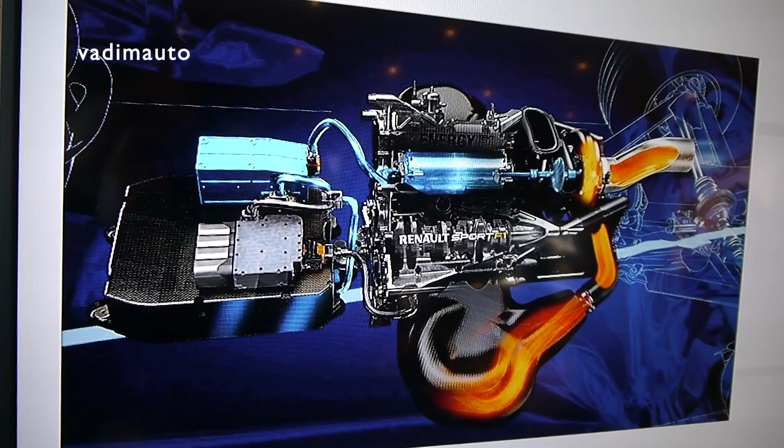The system borrows from Renault's Formula 1 team energy recovery practice, and an early version of the hybrid system was used in the EOLAB concept.

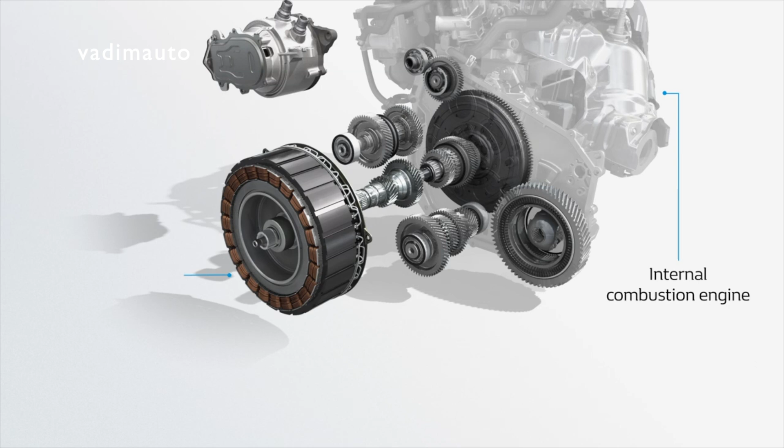What is E-Tech? It's a relatively simple and lightweight construction. There are two electric motors to assist a 1.6-liter, about 100 HP internal combustion engine used in Renault, Nissan, Dacia, and Lada Vesta. The naturally aspirated petrol engine has been reworked specifically for the hybrid.

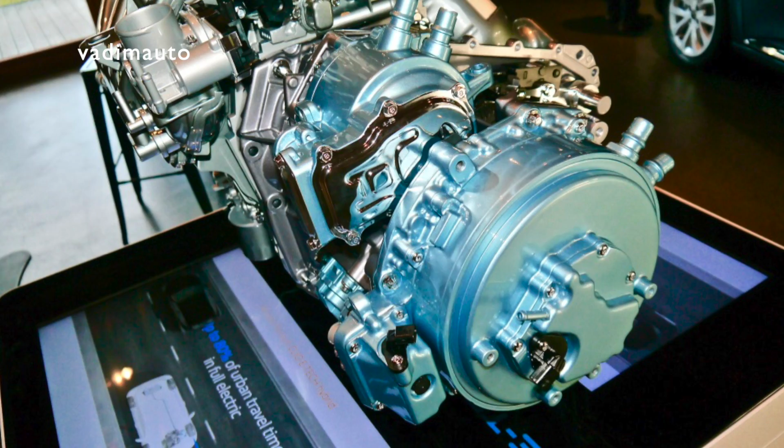There are no drive belts on the engine for the water pump, air conditioning compressor, brake and steering servo — all are electrically driven. The biggest high-voltage e-motor has 230 volts and 48 horsepower output. The smallest one, the high-voltage starter generator, has 230 volts and 20 HP.

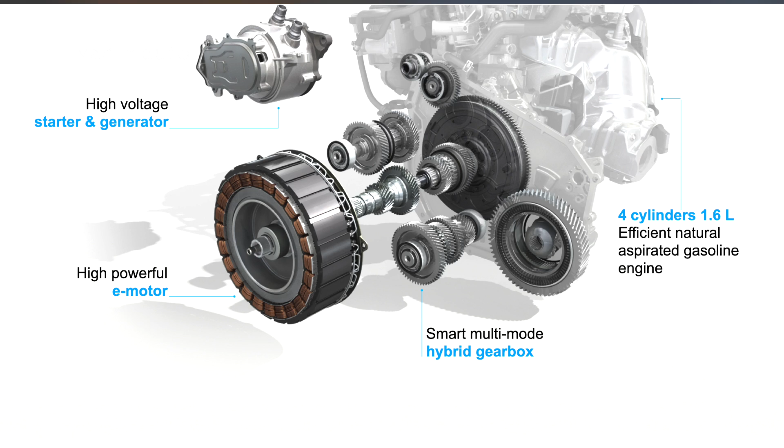Both motors can drive, recharge, and overrun. There is a new multi-mode gearbox with two gearboxes inside: a 4-speed gearbox for the petrol engine and a 2-speed for the e-motor. Each has a neutral gear.

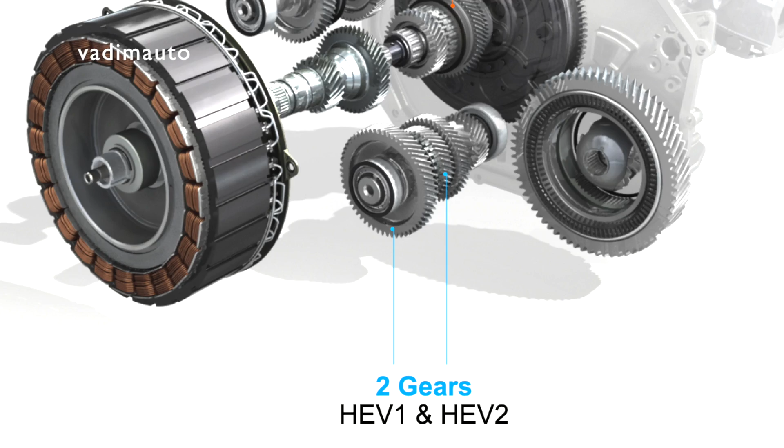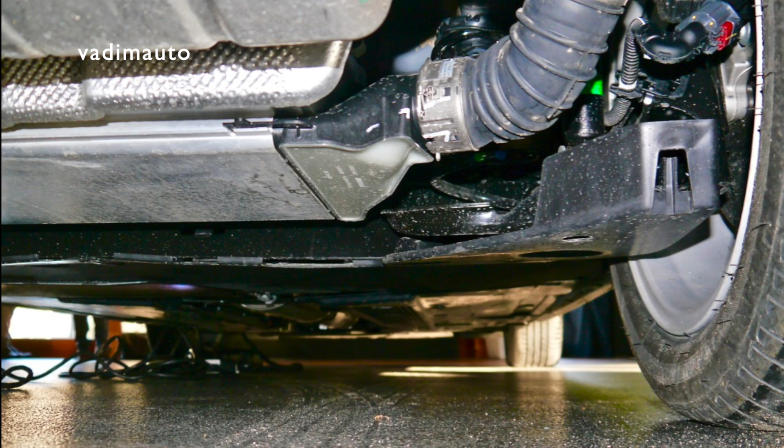The gearbox itself is a dog type, like in a racing car — no synchro, and clutch-free. The electric motor is used to start and move the car, and to go backwards too; the clutch is not needed. There is a 1.2 kWh lithium-ion battery in the back of the car.

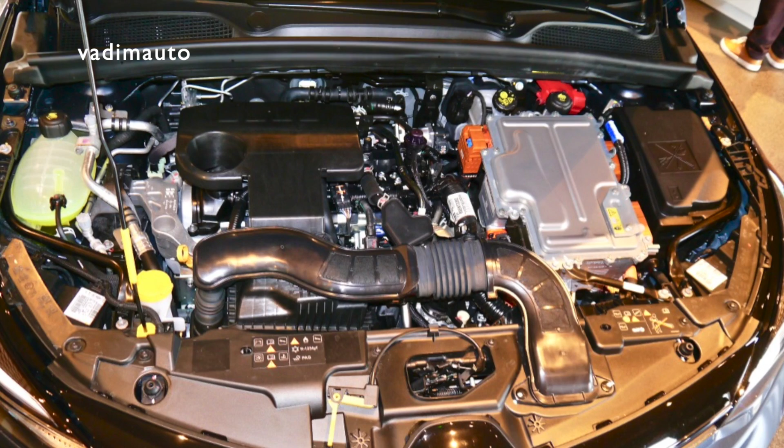It's charged by regenerative braking via the smaller motor generator, which is connected to the petrol engine. The Clio has a 140 horsepower combined output in full acceleration. The power comes from all three motors, petrol and two electric.

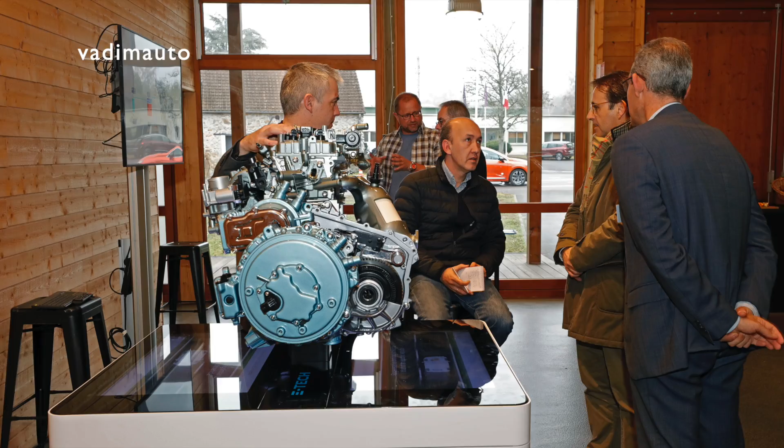Outside, it's the same Clio 5, with an E-Tech hybrid blue badge only. Inside, the car is fitted with a 9.3-inch screen with the new Renault Easy Connect connected interface.

There are several driving modes. Eco means you can use the electric battery for driving more than the petrol engine. My Sense blends petrol and electric motors for maximum economy. And Sport allows you to use the maximum power of all three engines.

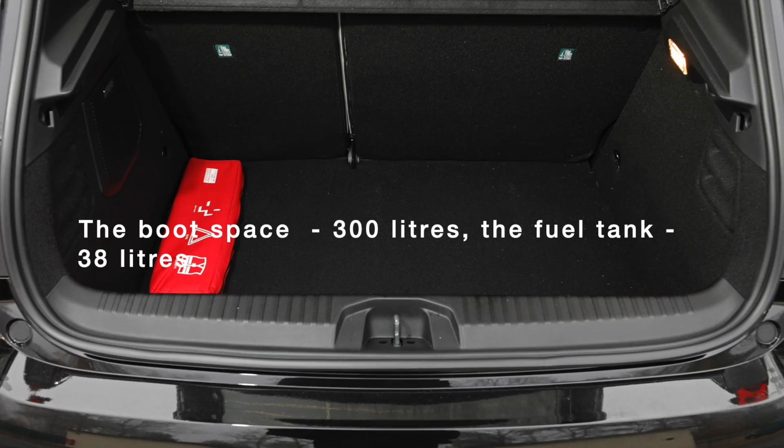Okay, here we go. If it's cold outside and the battery charge is low, the cabin needs to warm up. The petrol engine starts via the smaller electric motor to charge the battery to the required level. The combustion engine can't directly drive the wheels when you start to drive, until the car reaches about 15 km per hour.

This is because low-speed driving is done by the bigger electric motor with two gears only, improving performance and reducing fuel consumption. Then the small electric motor rapidly switches to speeding up the gearbox to synchronize the shifting, and it also functions as a brake regeneration module and occasional power booster.

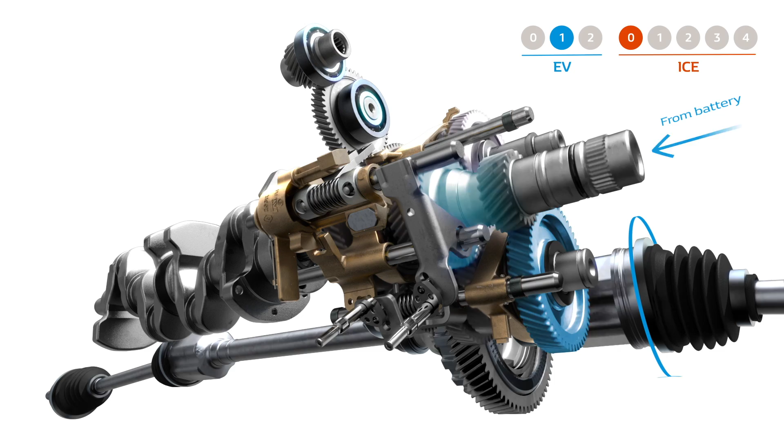If you push the EV button, you can travel by electric power at a speed up to 75 km per hour and improve fuel economy.

There are three persons inside the car: myself, my colleague Michael Macaulay from Ireland, and Olivier Bros, Renault's B-segment program director. He pushes the EV mode as long as the battery allows it.

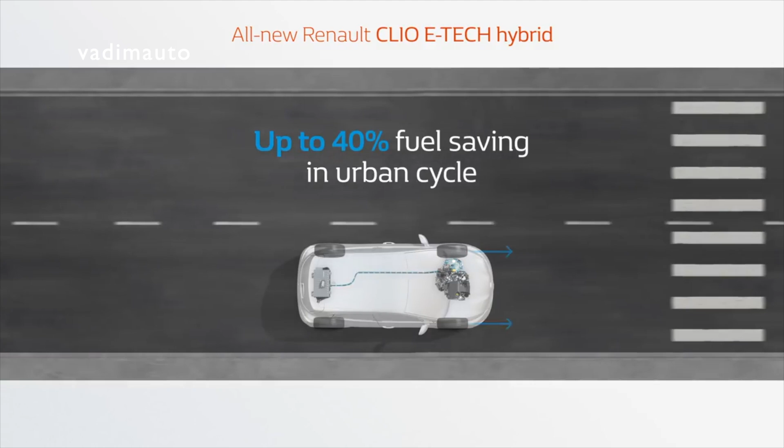If the battery is low, the petrol engine starts via the small electric motor through a solenoid to charge the battery to the required level. The battery in turn gives energy to the bigger electric motor, which directly drives the wheels using two gears. At that time, the system works like a series hybrid mode, as long as it can, depending on how much power the car needs.

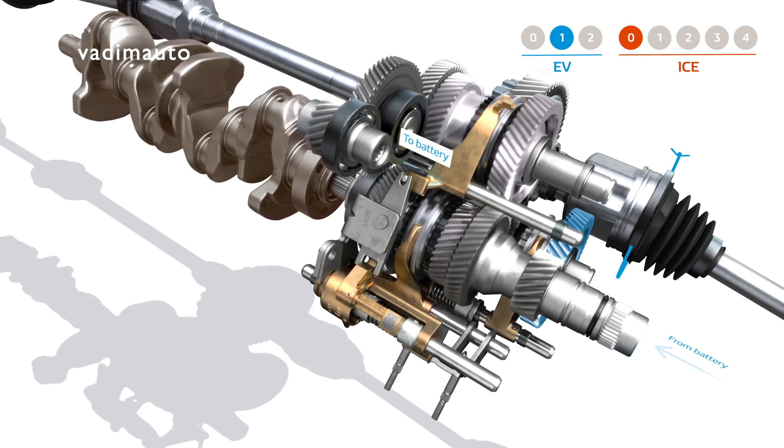If it needs more power when the battery is low, the petrol engine with 4 gears can directly drive the wheels like a parallel hybrid, and gives revs higher than necessary to use the extra revs to charge the battery via the small electric motor. In this case, the system works like a serial-parallel hybrid mode, because the petrol engine drives the wheels and charges the battery at the same time. That's why the throttle pedal feels so light at that moment, and the engine revs so high.

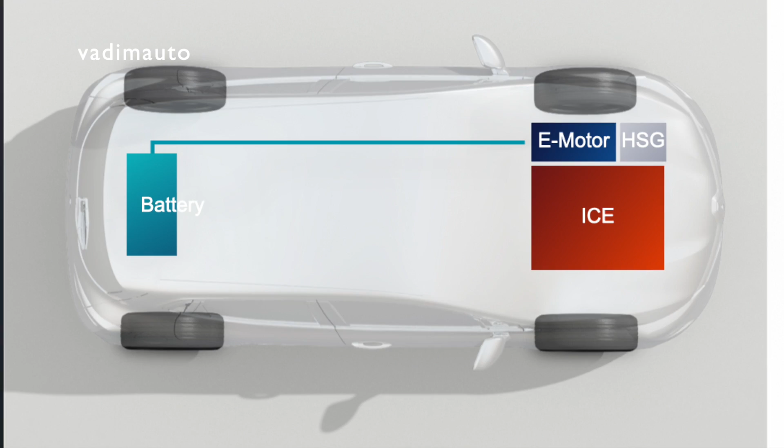The hybrid system also can disconnect the electric drivetrain for faster motorway driving, or the petrol engine for cruising speed using power from the electric motor only. The promise is that emissions from the Clio will fall below 100 grams per kilometer, with an expected combined fuel economy of 4.5 liters per 100 kilometers.

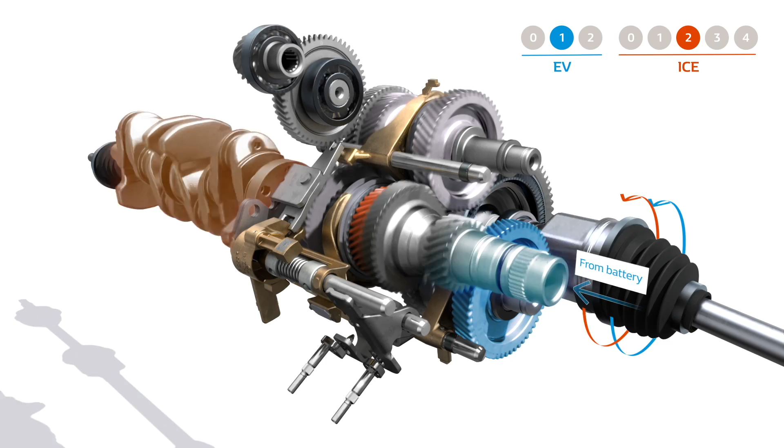All in all, the powertrain system of the hybrid is multifaceted. There are at least 15 different drive modes, or combinations of power source and ratio, in the Clio hybrid. In the case of heavy acceleration, all 3 motors, as in Formula 1, develop maximum power. For this hybrid, it's 140 HP.

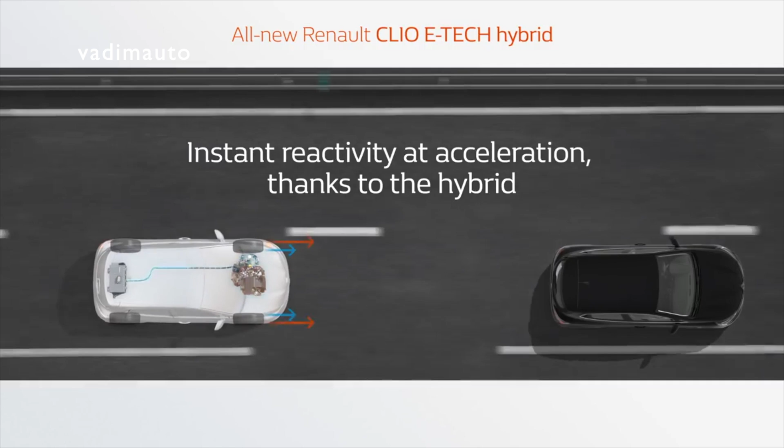Olivier Bros says the acceleration from 80 to 100 km per hour takes about 6.9 seconds. We tested the sprint from 0 to 100 km per hour. It feels a bit laggy and takes less than 9 seconds with 3 persons inside.

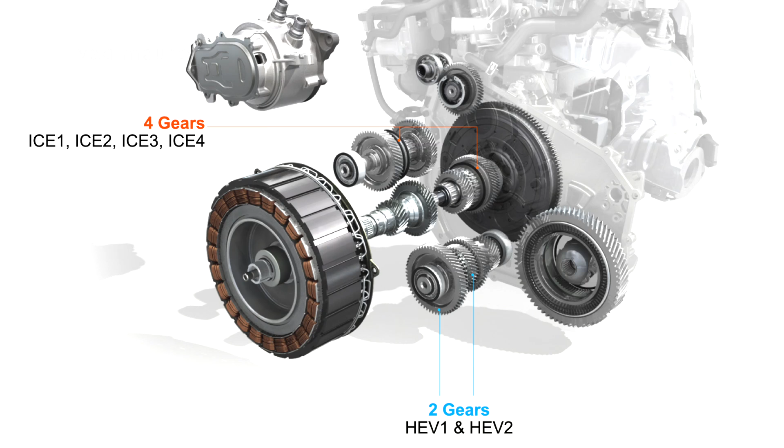And when you are accelerating, it goes back to second. The gap between second and third is actually intentionally quite high because we wanted to avoid using second. So you really use second only when you need acceleration. And because of this high gap, sometimes we wait a little bit long to switch to third. As you remember, the small electric motor synchronizes the gearbox input shaft speed and crankshaft speed, like in a Formula 1 dog box. It's rev-matching the gears for better shifting, and does it well. Usually a dog box gives very harsh and noisy shifts, but it's not like that here in the Clio hybrid.

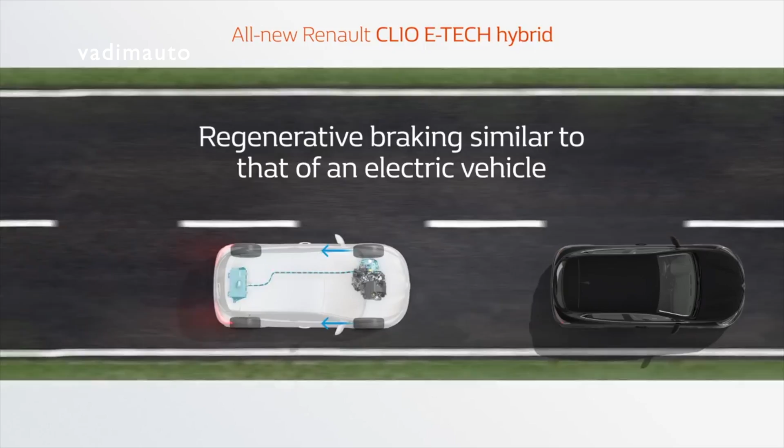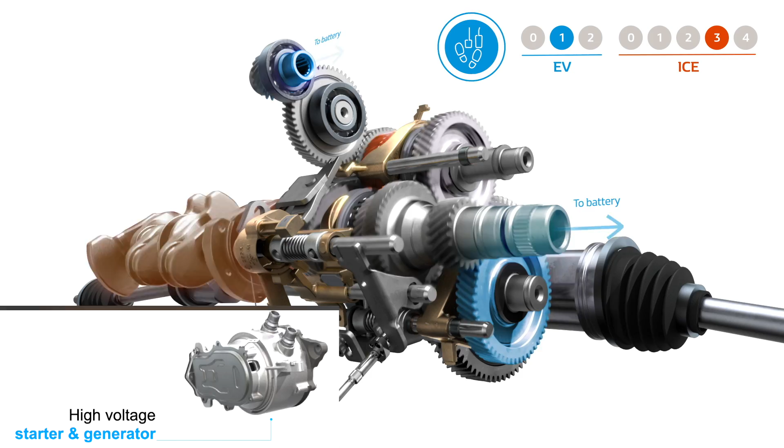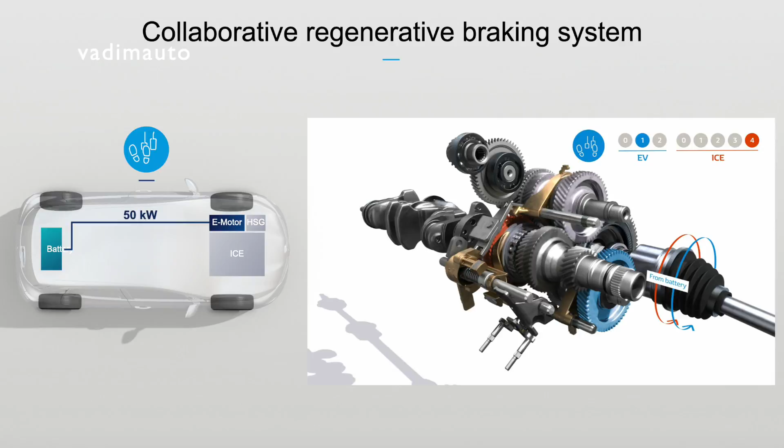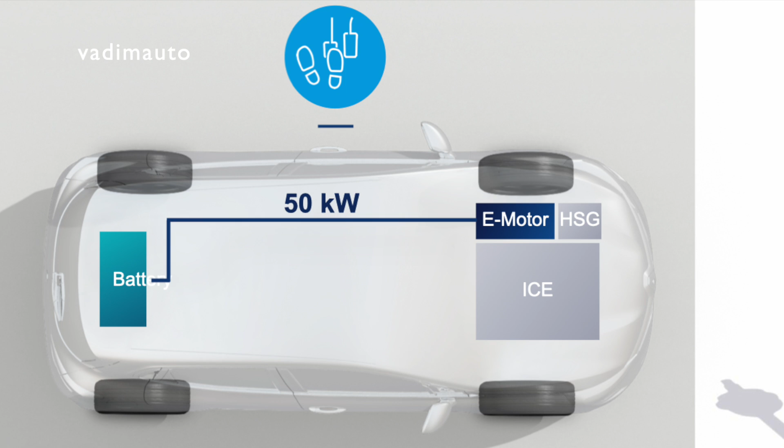At the same time, Clio E-Tech technology optimizes energy use while slowing when the driver lifts his foot off the throttle and braking. During deceleration, the bigger electric motor converts kinetic energy into electrical energy and transfers it to the battery. The small electric motor does the same, using kinetic energy from the petrol engine until it stops. The charging power is about 15 kilowatts, increased up to 50 kilowatts when you press down the brake pedal. The big electric motor provides additional braking, recovering excess energy and returning it to the battery as much as needed. During braking, the system uses full mixed braking with priority given to regenerative braking, where additional hydraulic braking power comes from the brake pads only if necessary. This means that the battery is charging very quickly.

If we need more regenerative energy, we need to shift the gear stick from D drive to B brake mode. There are no additional shift paddles for regenerative braking on the steering wheel. In this mode, the Clio hybrid slows down much faster, and I hardly used the brake pedal in the city. Now it's still in B mode.

It's 100. How big is that second electric motor, the one for regeneration? It's 15 kilowatts. Okay.

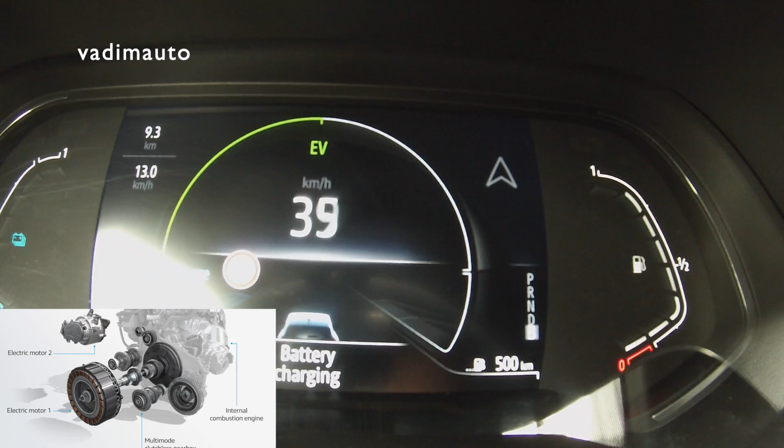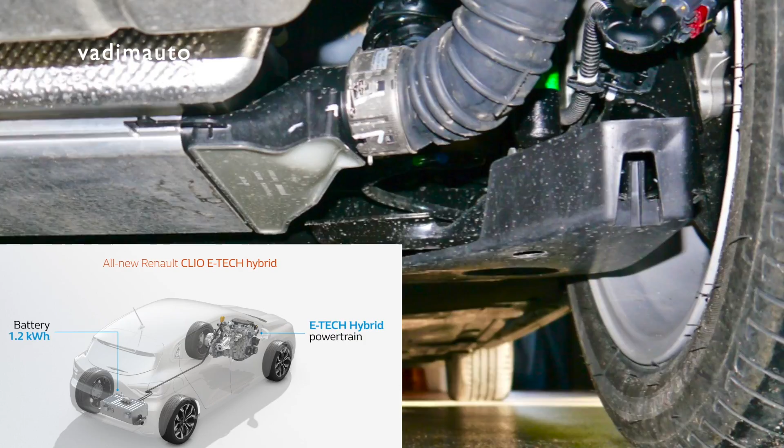So if you are talking about driving feeling and behavior on the road, it's very close to the usual Clio 5. The hybrid is not so heavy, the car weighs about 1250 kilograms. The suspension is the same as in the diesel version, with the exception of the rear torsion beam, where the anti-roll bar is stiffer due to the additional weight from the 38 kg battery. The steering feels weighted and direct.

The clever Clio E-Tech hybrid will go on sale in spring this year, and will hopefully come at an attractive price. After a 40 km drive, the fuel consumption was 6.0 liters per 100 km, with an average speed of 25 km per hour.